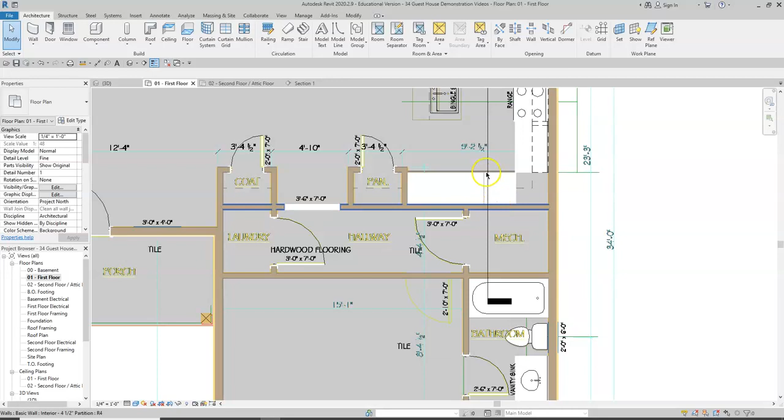To finish out our kitchen, we will work on the countertop portion of the base cabinets, work on a filler piece for the base cabinet filler, and also work on our island and import the single sink.

Continuing on with the cabinet unit, we will first need to click on a wall section and cut a section through the kitchen. Once we have our section cut, we will go to the view, and this will be our second section here.

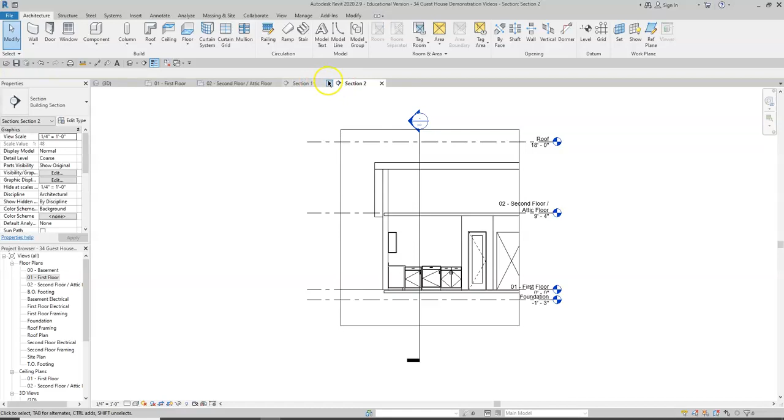Notice now we have an issue with the height of our cabinets. One of our cabinets was imported and was not hosted to the slab, which we placed at -1 earlier in our video.

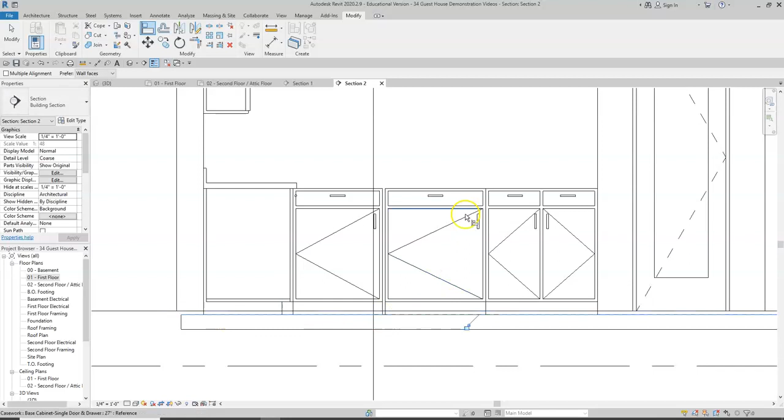Our align tool will allow us to lower the height, and we can now add the filler for the two cabinets.

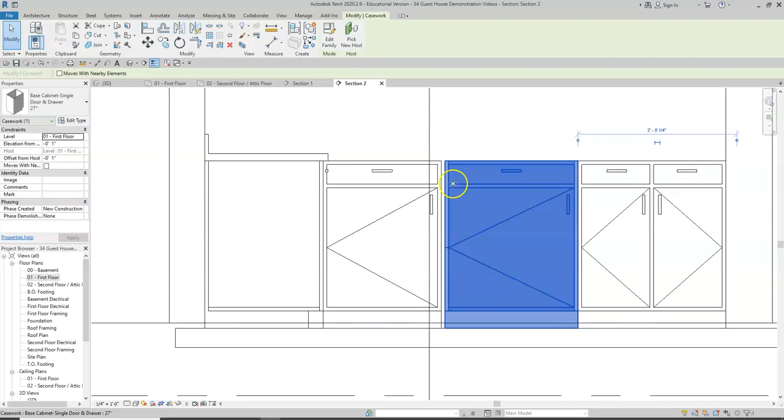So we'll click on Component and add our base cabinet filler.

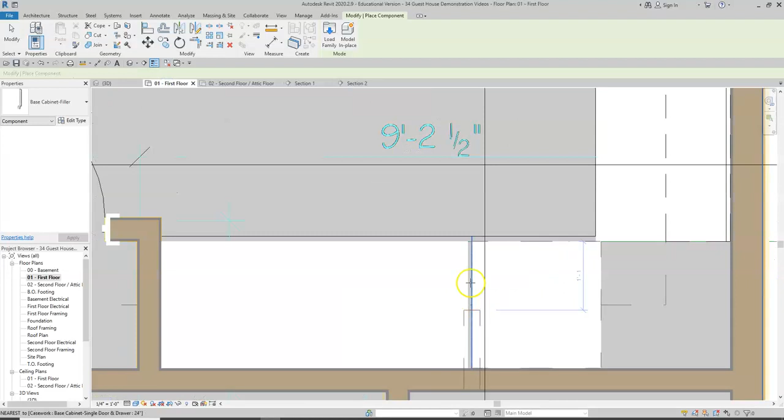As happened last time, we will need to be in a plan view, so we'll go back to our first floor view and place the filler piece in accordingly. Always have the cursor on the wall when you are placing the filler. You'll see the filler piece is here, and it overlaps.

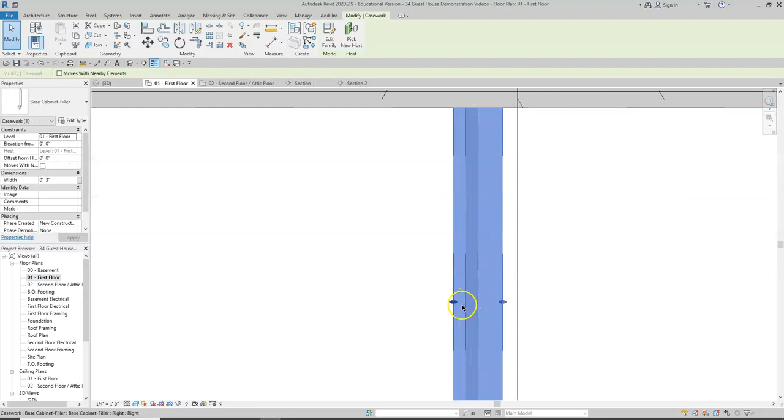Remember, clicking and dragging is not as precise as the align tool, so we need to get zoomed in, and we will use align.

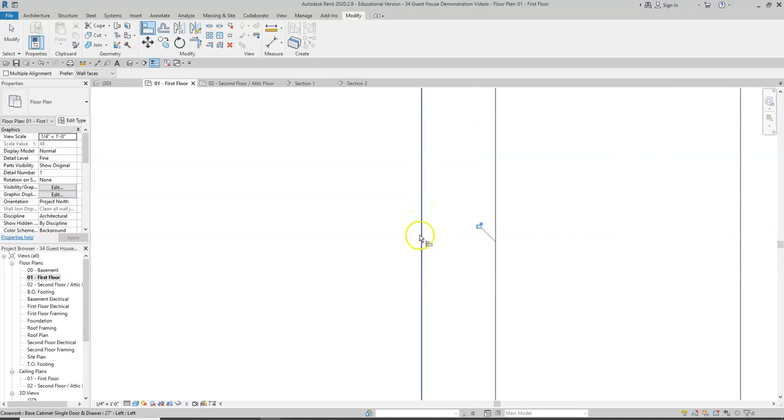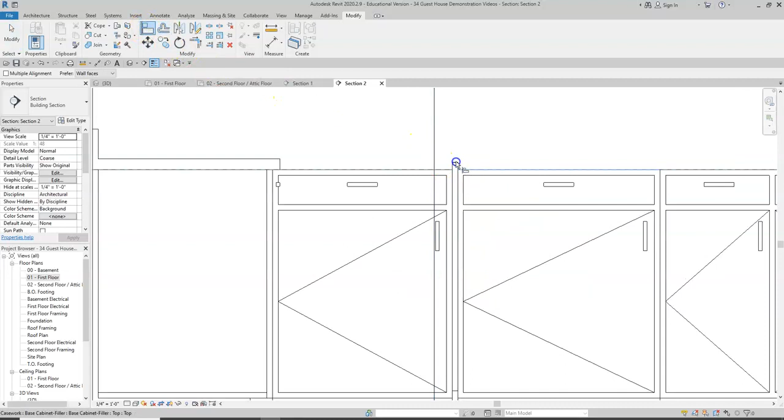It appears we have our filler piece correct. Same thing happened, it came in high, not a problem. We will align top and top, bottom and bottom, and we are all set.

Now remember, we made this a custom piece. If you wanted to use the double door cabinet and make it the custom 27, that's fine, as long as it's a multiple of 3. In future projects you would design a custom kitchen, so you may have a whole different series of shelves or cabinets set up with drawers, or it could be an open cabinet. It really just depends on your design. So if you want to use the double door cabinet here, that's fine, or if you want to leave it with single, not a problem.

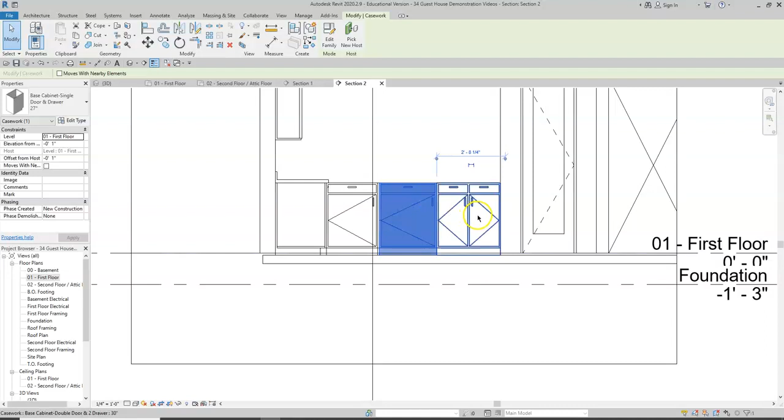Next we will add our upper cabinets and our countertop. This is the same piece we used earlier, so we can click on the countertop and copy it and rotate it, or we could have imported a new one, but I'm going to show you the copying now.

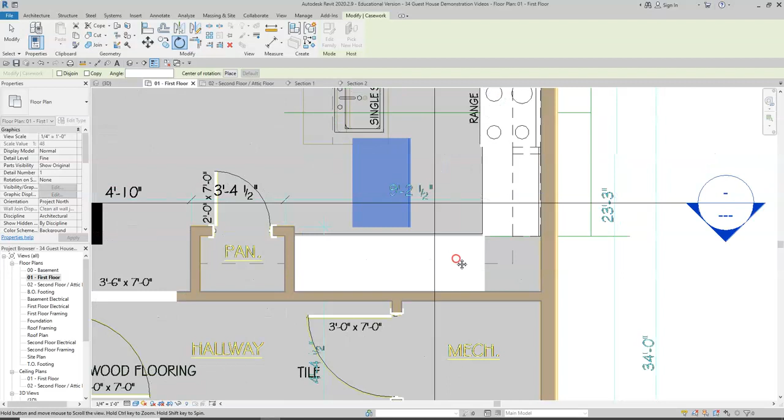We can click on the copy button, which is right here, and it's a simple click and drag, and there's a copy of the original. Then the rotate command will allow you to click and rotate. The degrees that appear will be the rotation degrees, so we want it to be 90. It's always better to be specific, so we can type 90 and that will make it exactly 90 degrees.

Now we can use our align tool and align this countertop to the wall line, then align the edges to the walls. We'll also drag this piece all the way down and align it to the wall as well, and I'll show you why.

We have this backsplash lip on the back edge of the countertop, and before it ended here, but we actually want that piece to continue. Yes, these two are overlapping, but that is not a problem in Revit, because when we do our graphics exporting at the end, you will see that all those joining lines will disappear.

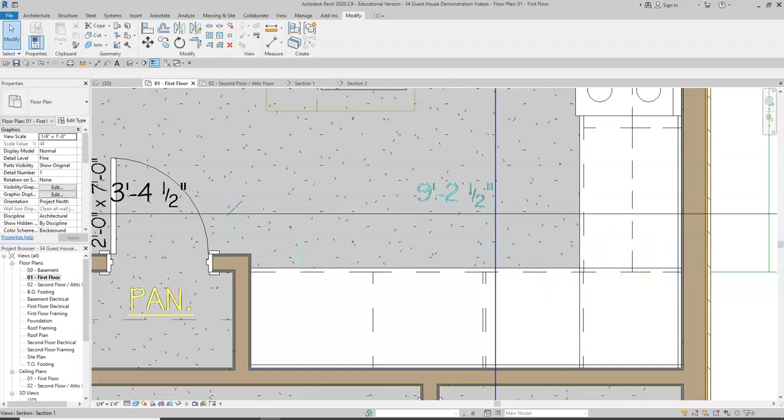Let me show you what it looks like in a 3D view. This will be a new feature of Revit that you haven't used yet. We can click on this drop-down view, and we can click on a camera view. Now the camera will be exactly what it looks like when you're standing in the space.

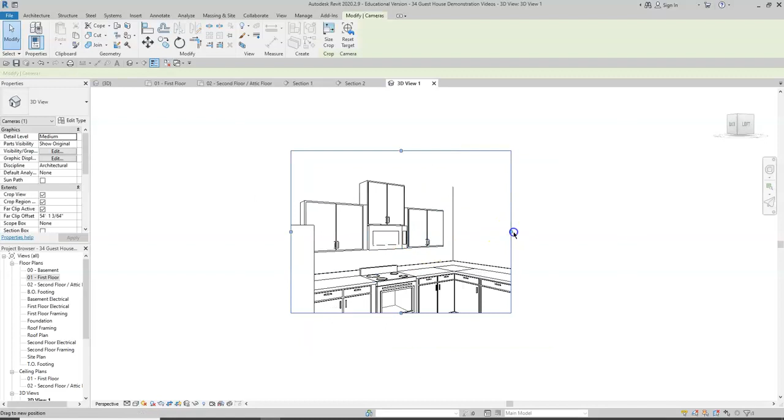So you see I have a camera icon on my mouse. Where I click first will be where I'm standing, and then I pull my camera through the room and click, and now my 3D view appears, showing how it would look if we were standing in the space.

We have a few things here I've noticed. The walls are extending above in the ceiling area. To fix that real quick, we can click on the floor that's above.

What happened was these walls were placed in after the attic floor was in place.

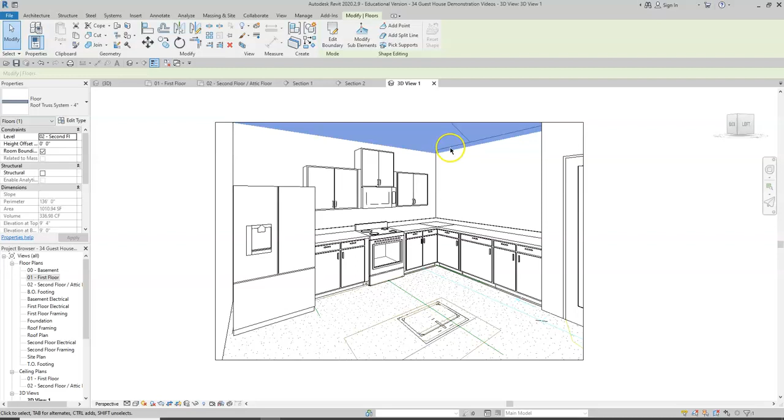So we'll click on edit boundary. In this view, it's okay. Click the green check, and then again, 99 out of 100 times we want the floors to attach. So we're going to attach, and anything that says it can't be joined anymore, that's okay. We'll just let them remain unjoined.

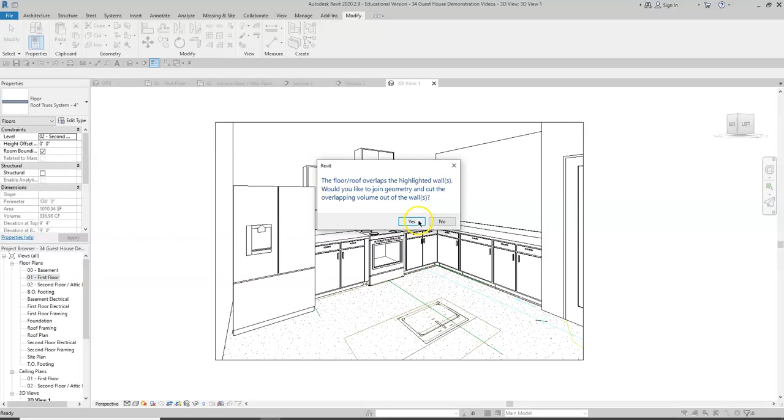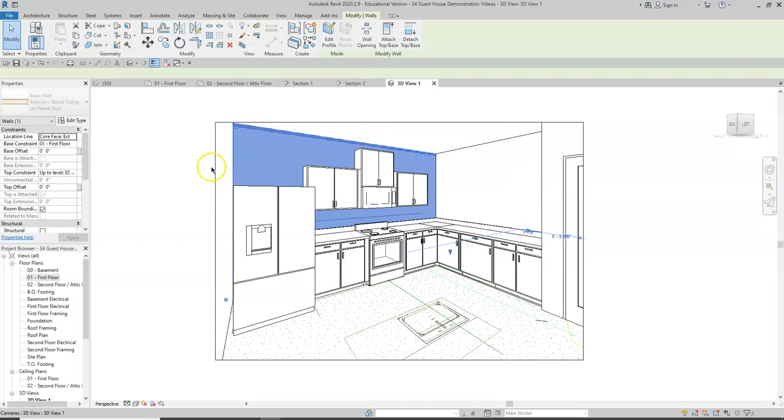Alright, so here's my ceiling connection, here's my walls. We're missing the upper cabinets, so let's go ahead and add those real quick, and then we'll do the island, and we will get moving on to the next part.

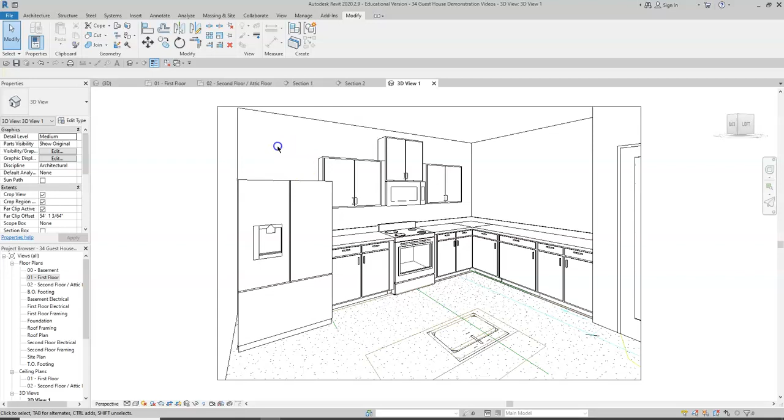You could also insert a cabinet above the refrigerator that's 2 feet deep. Your wall cabinets are 1 foot deep so that they're not the same thickness as the base, otherwise you wouldn't be able to reach back on the countertop. So your upper cabinets are 1 foot deep, your lower cabinets are 2. You could put a 2 foot cabinet above here if you prefer. That's completely up to you. I'll just leave it blank for now.

We're going to go back to first floor, and we're going to quickly put in some of our uppers. The level of detail in Revit allows us to really spend a lot of time in the kitchen making it look exactly right, but it does take a little while.

Alright, upper cabinets, let's click on the base cabinet and see our measurement. I believe that was a 30. So we'll go to architecture component, and we'll find the upper cabinet that's 30. Alright, select that. We'll align it correctly real fast. Align, align.

Next one is 27, which we created on our own. And the beauty of Revit and how things just work out, the upper has a 27, but the base did not. So we'll use 27, and we will align.

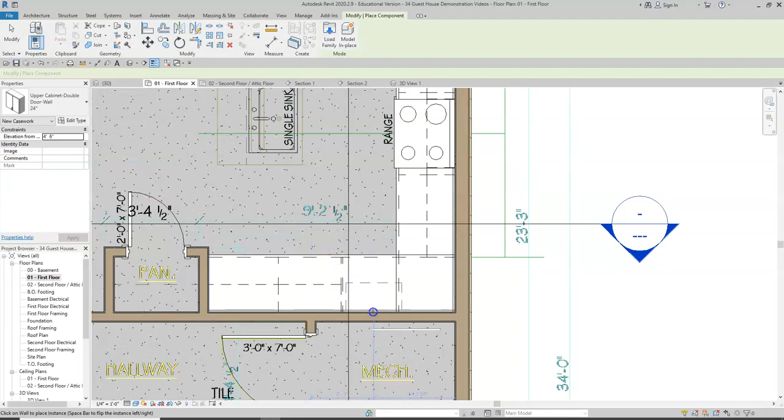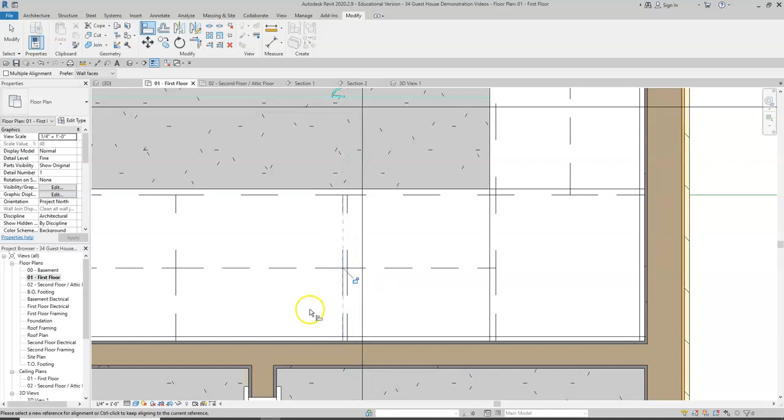We will need the upper filler, and then we have the 24. So we'll put the 24 in first. Place it down, align to this edge. And that's my filler gap component and upper filler. Have my cursor on the wall, and I will align 1 and 2 and 1 and 2. Alright, that's set. We'll get on the island real fast.

Same deal. We're going to have a dishwasher here, which is not noted on this plan, but we will have a dishwasher here, and a base cabinet. So let's get a base cabinet that is probably in the 40s, would be my guess. Let's try 42. And that's probably a little generous. Well, actually, no, it's a little generous. We'll go 39 because we want to be centered under the single sink.

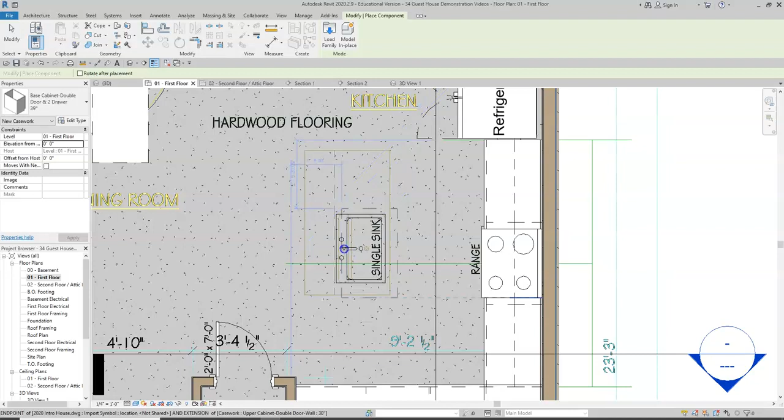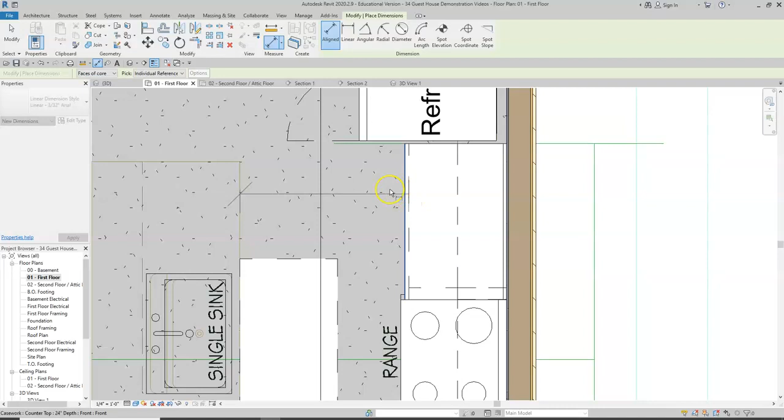Which we will need another model line for. So for you, as the user without the drawing on your screen, you will know that this distance from base cabinet to base cabinet is 42 inches, 3 feet 6. I'll show you that right now, just so you can see. Yeah, 3 foot 6. That snapped to the countertop.

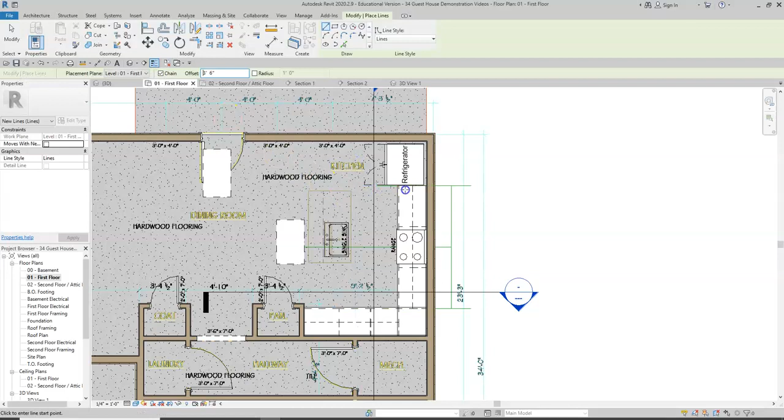So it's 42 inches. So instead of clicking the base cabinet in first, let's leave that on the side. We will locate the model line button, and we will offset 3 foot 6, and we will physically draw in lines to show this offset. So we'll go all the way down to the base cabinet here and over, and we have our lines here.

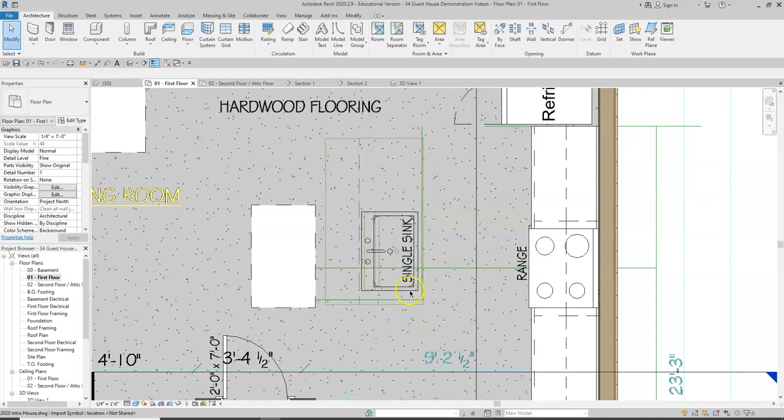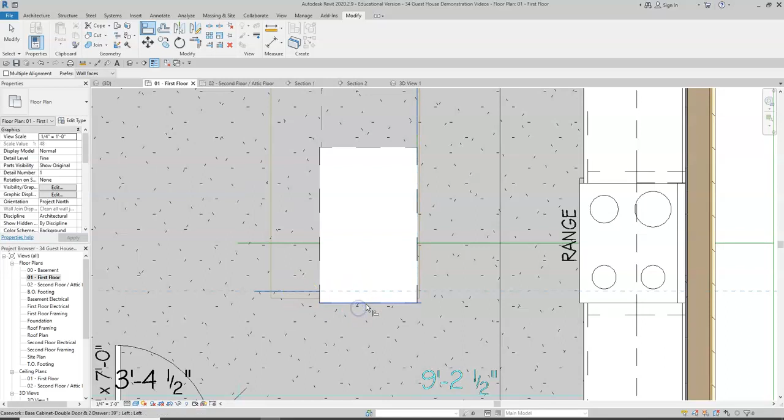Now that's going to be a boundary from the base cabinet to the base cabinet. We are a little bit off here, but we'll go ahead and put it on the model line since that's what you have. We're going to use the align tool, use my model line, align model line to base cabinet, and then model line to the edge of the base cabinet. So that's my corner. We will put the sink in the center, and then we'll put the dishwasher in.

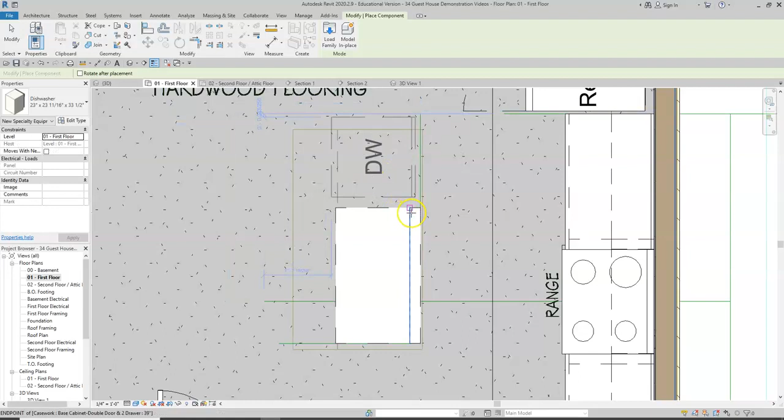So let's go ahead and put the dishwasher down. We'll go to component, and we will select the dishwasher. You can also type in, and we'll pick the smallest. It's a small home, no reason to choose the big one. Alright, we can align front to front. It looks pretty close, but we'll make sure it's exact because the details matter.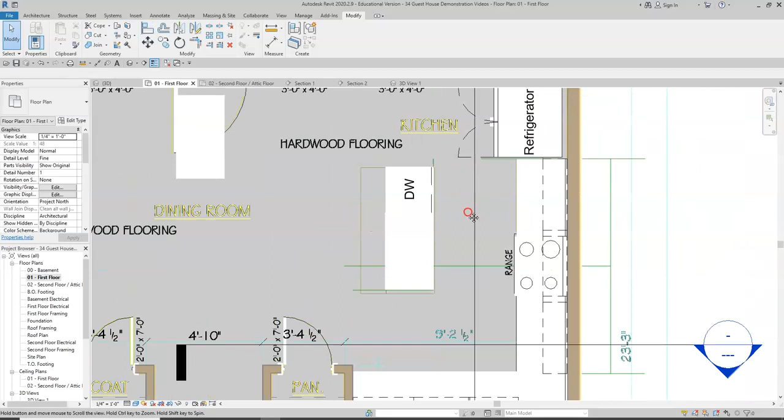Alright, so now we will add our countertop on top with the sink hole, which we have not done yet for the kitchen. So we're going to click on component, and we'll click on countertop, counter, and see what we have. We have a vanity countertop, but we do not have the kitchen countertop. Actually, we have the island countertop with sinkhole. That works because we have that scenario. So we don't need to import anything new.

We need to place down this big countertop, and then we will shift it to be what we need. First thing we're going to do is find the sink center, which we have. And then here are my two lines for the actual sink itself. It's a little wonky, got to play with it a little bit. So actually, let's pause this video, and we will pick it up on the next video, and we will complete our kitchen.